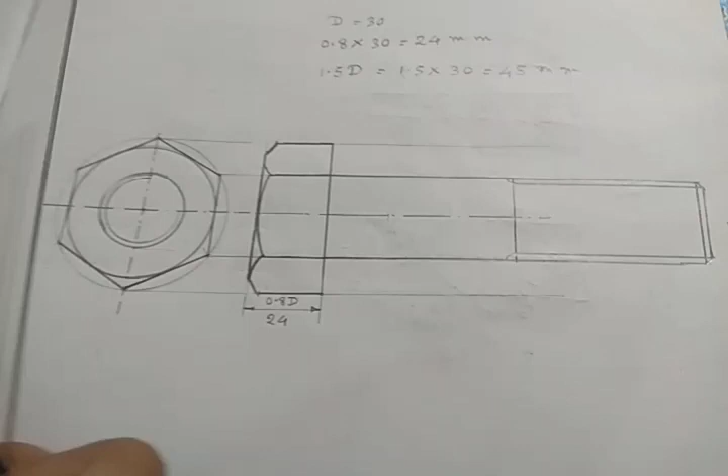In our last classes, we have done this drawing. This is basically a nut and bolt drawing, and this was from side view, and this was front view. We know how to draw it. Now, this is the second part of nut bolt drawing. Today, our topic is again nut bolt, and we are going to draw the nut bolt.

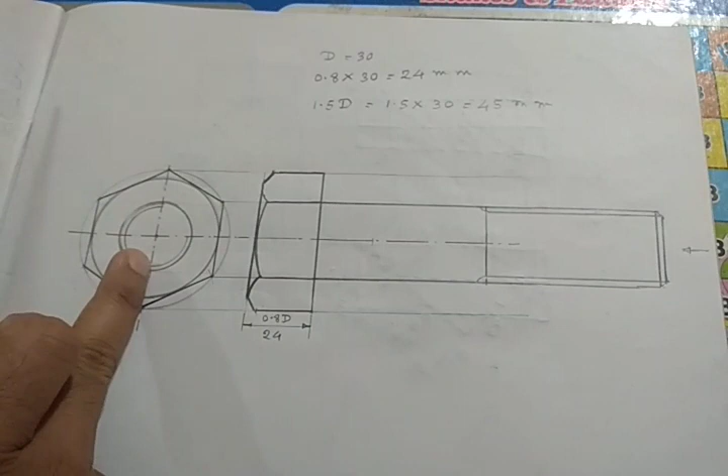What is the remaining here? The remaining part here is: front view and side view is complete, but top view is not here. We are going to draw the top view of the bolt here, and now I am going to show you how to draw the top view of the bolt.

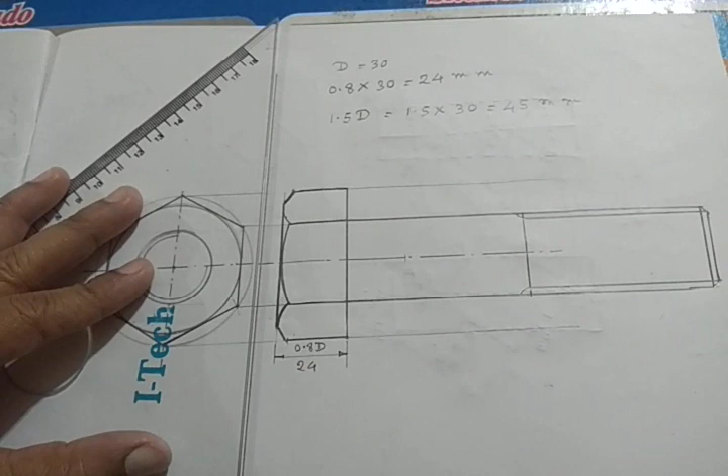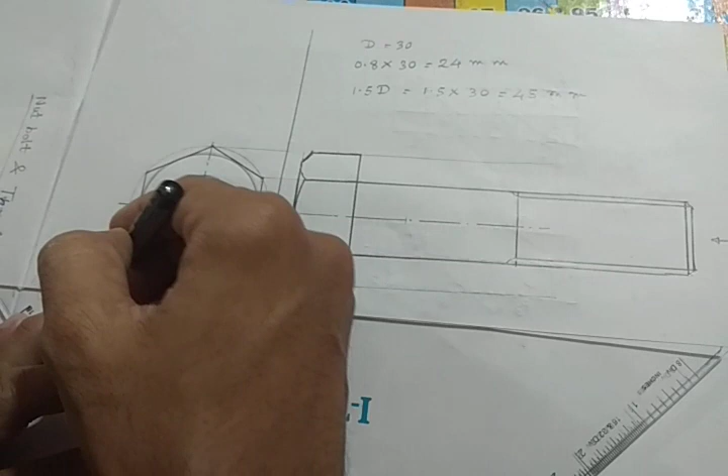Okay, let's go. Look, I am drawing a vertical line from the middle. From anywhere you can do that. That means there is no measurement here between front view and side view. From anywhere you can draw this line. And now I am drawing a horizontal line. I am again saying I am drawing it almost freehand because I am not using any set square or T square here, but you have to use set square obviously.

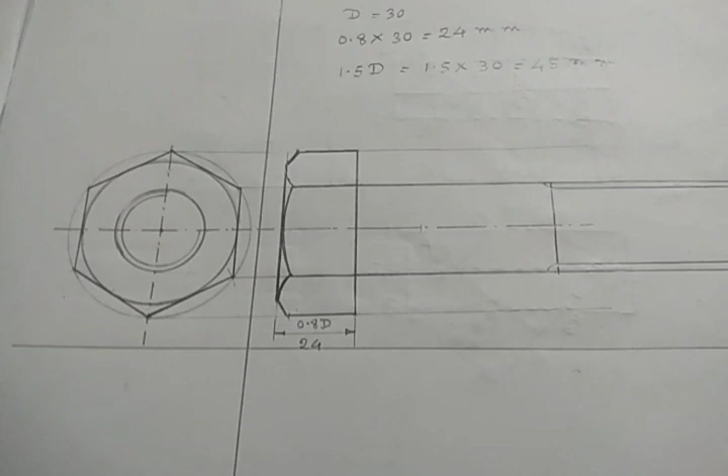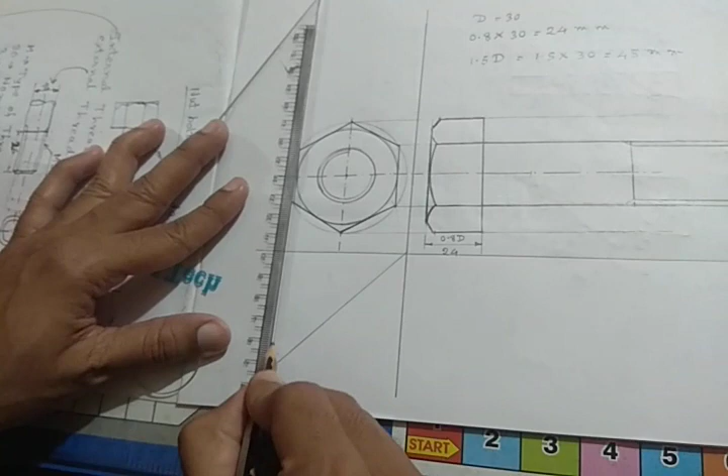Okay, then you have to draw a 45-degree angle from this point. So you have to draw 45-degree angle like this. Okay, now you have to draw these projection lines like this. These projection lines like this, and these projection lines, that means from the nominal diameter. This is from the nominal diameter.

So how many projection lines are there? 1, 2, 3, 4, 5. 5 projection lines are there. These are vertical projection lines. And now we have to draw the horizontal projection lines from these points. You know it. Again I am saying you have to use set square to draw these projection lines to make it proper horizontal. I am not using set square properly because I am only demonstrating you, but you must use set square for drawing this part.

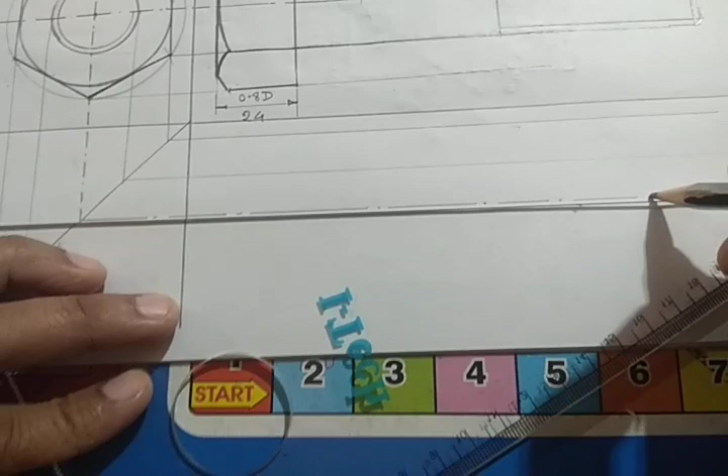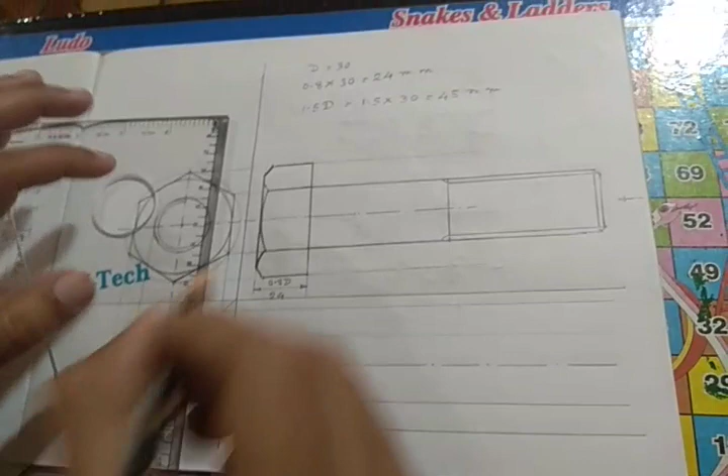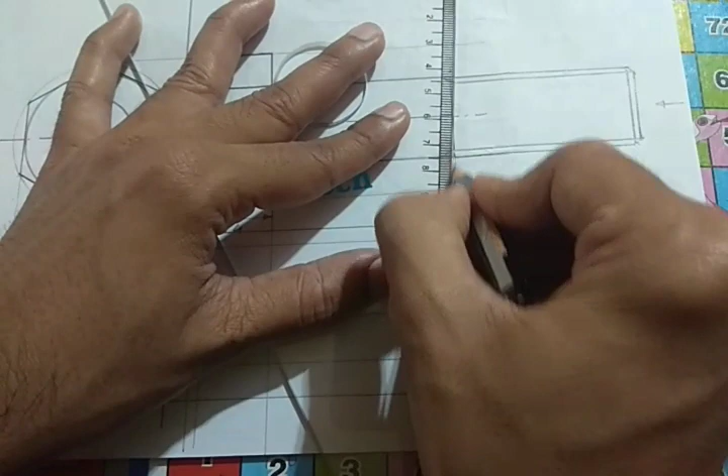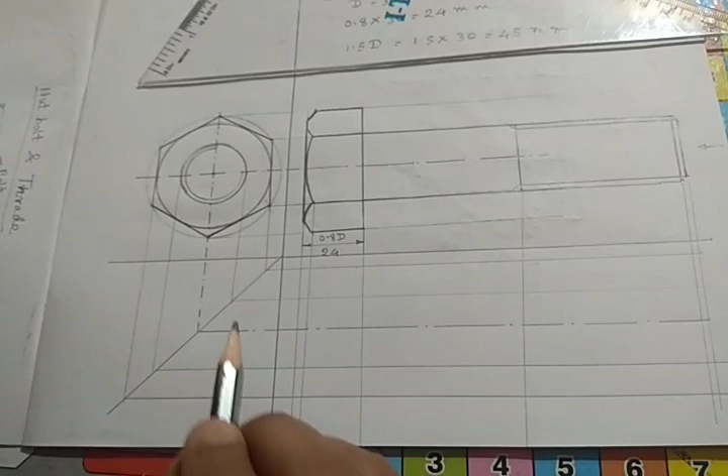Okay, it is done. 1, 2, 3, 4, 5. Now I am doing from front view. I am taking the projections from these points. Look at this. From this point, from these 2 points. Okay, from this point, and lastly from these 2 points. Okay, so projection lines are complete. Now I am doing the curves, and I will make it dark, and it will finally create a top view of the bolt.

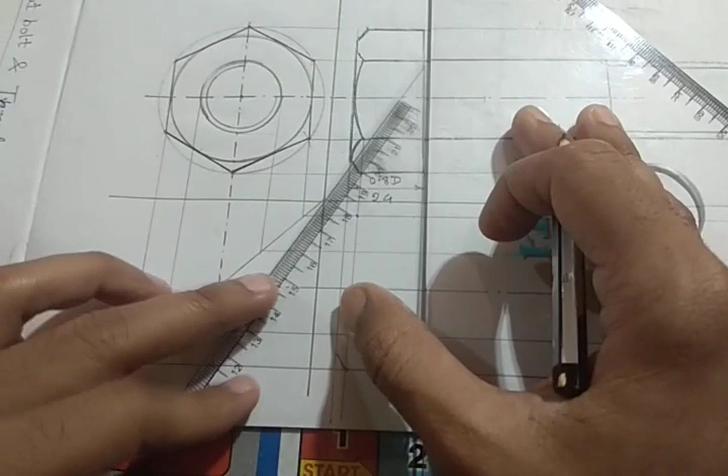You know, the chamfering angles were 30 degree. I'm again doing the chamfering angles 30 degree by using set square from this point and from this point. Look at this, 30 degree. I'm using 30 degree points. Look, and just reverse it from this point, again a 30-degree line. Look, from this point I am doing these 30-degree lines. Now I am doing a curve by freehand.

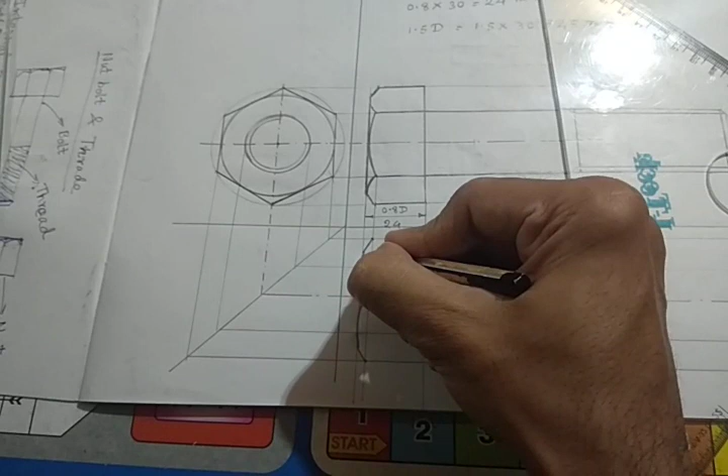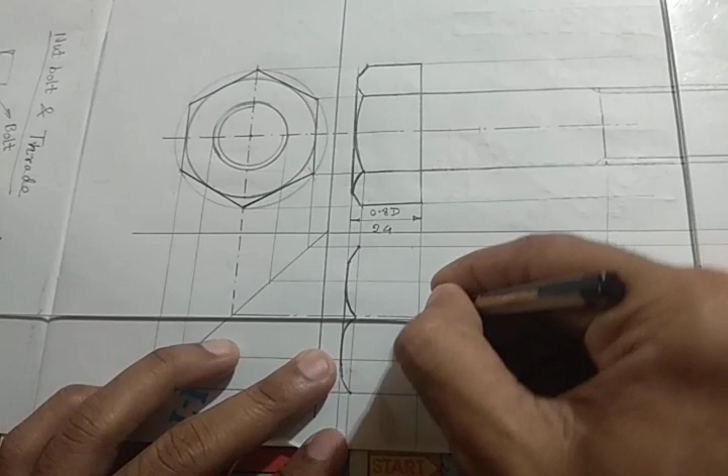Like this, and you have to just dark it. You have to just dark it, and this will be dark. Why this will be dark, I will explain you later. This will be dark, this will be dark, and this will be dark. Necessary parts I am making dark.

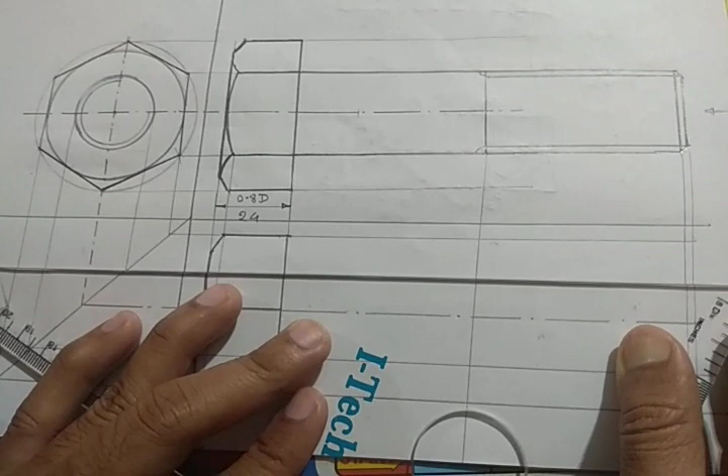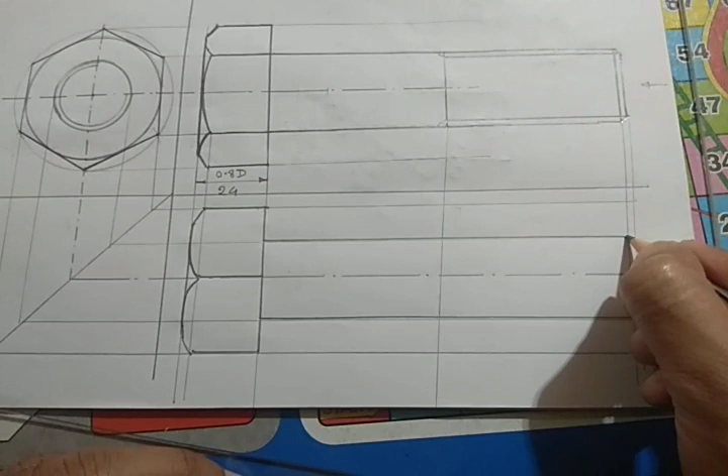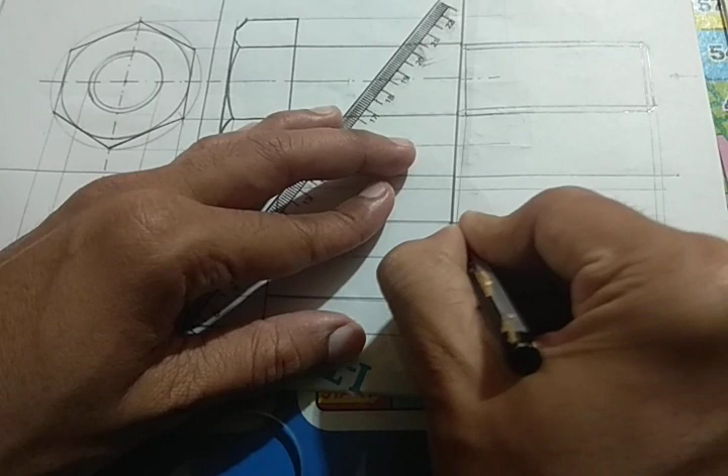And like the front view, I'm again doing this part, a little bit of chamfering. I'm doing it by freehand, but this angle will be 45 degree, you know. And you have to do the thread again by using double line. Like this. This is our thread part, and this is the end part of this thread. So look at this. This is the top view of the bolt.

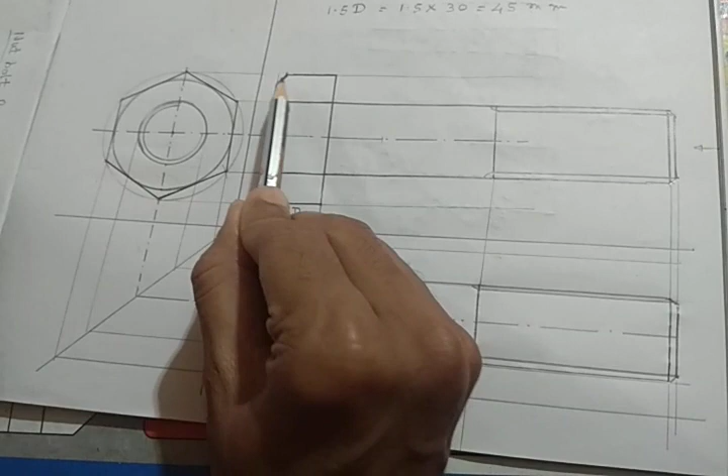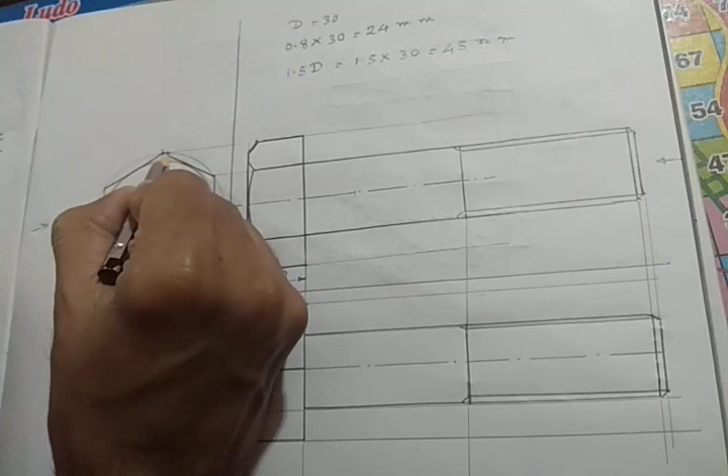Now one thing I want to explain you. In front view, you can see three parts, three layers, three surfaces. One surface, two surface, and three surface. Why? Because from front view, if I look at it from this side, look at this hexagonal bolt: one surface, two surface, and three surface. These three surfaces are visible from front view.

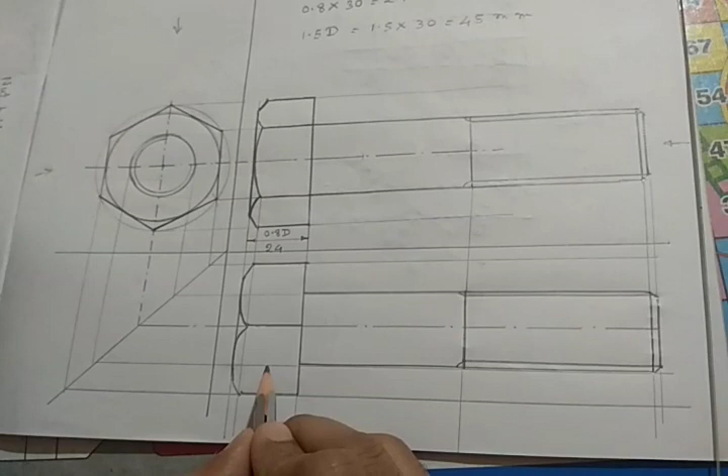If you look from top, then look, there is one surface and two surface. And in top view, look, there is one surface and there is another surface. So from top view, two surfaces will be visible, and from front view, three surfaces will be visible. So this is the complete drawing: front view, top view, and side view of a bolt.

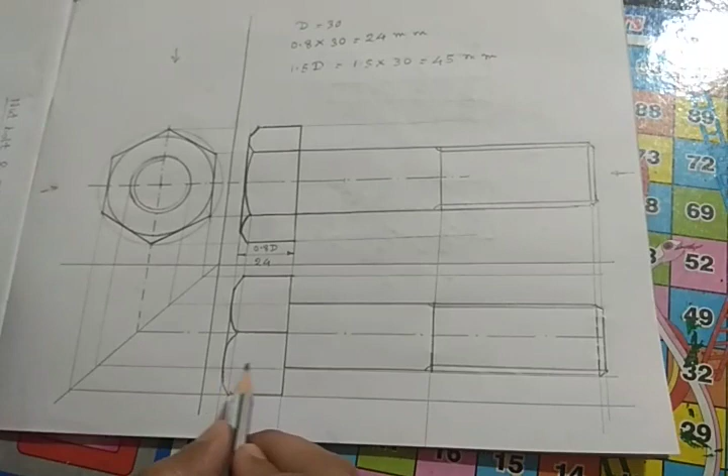Okay, now I will explain you how to draw a nut. This is very simple. I think you can do it, but one thing: what lines are dark in my drawing, look at it very carefully. Except these lines, you should not dark any other line. Except these lines, the other lines will be thin continuous lines. I am showing which lines will be dark.

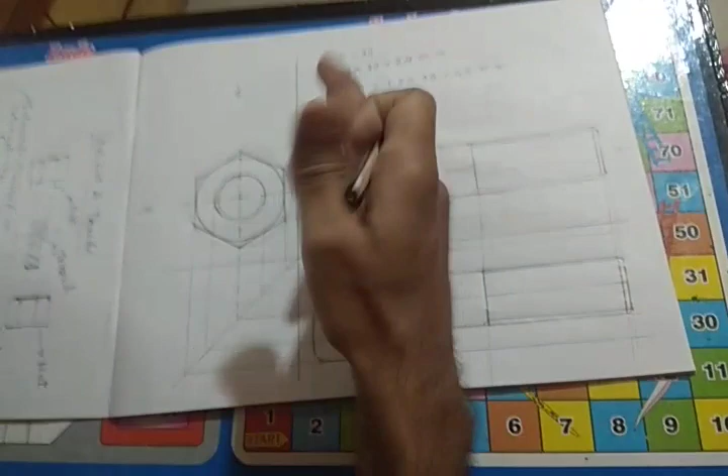Okay, so next I am going to the nut part, how to draw a nut. It is the same. In case of nut, this part will not be there, because for nut there is no extended part. So I am drawing a nut, and in nut there will be internal thread. This is the difference. So look how I am drawing a nut. Here also d is equal to 30. I am taking d is equal to 30.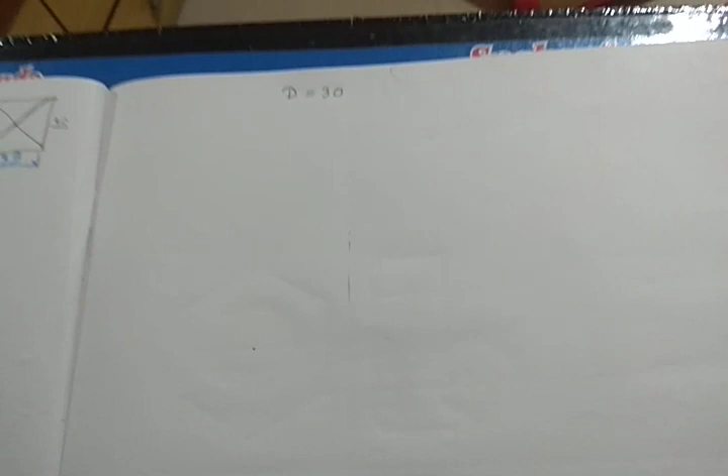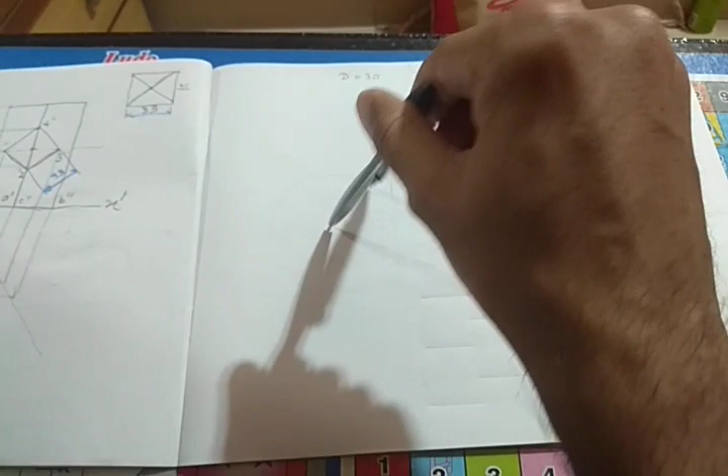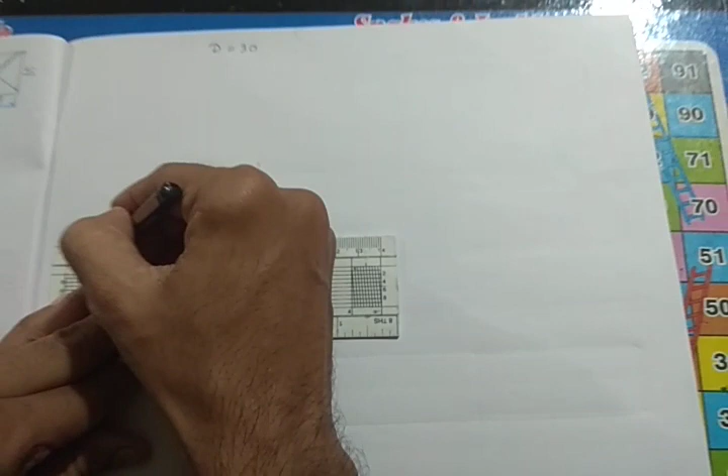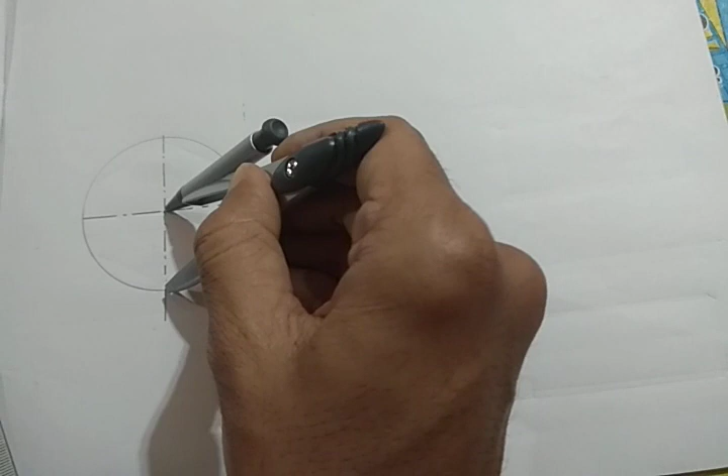So from the last class, you know, I have to take 30 millimeter from the scale, and you have to make a circle in light. Means it will be light, it will not be dark. And then you have to draw a vertical and horizontal line. Again I am saying you have to use set squares to draw the horizontal and vertical lines. I am doing it only by scale. You have to take care about this, otherwise the drawing will not be correct. Then what will we do? We will draw a hexagon.

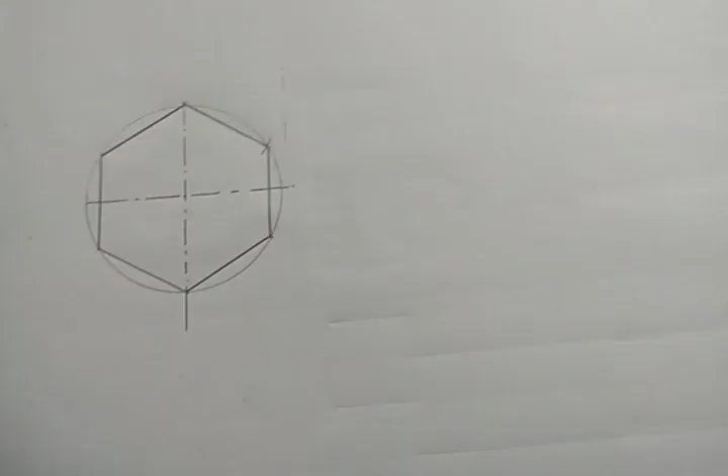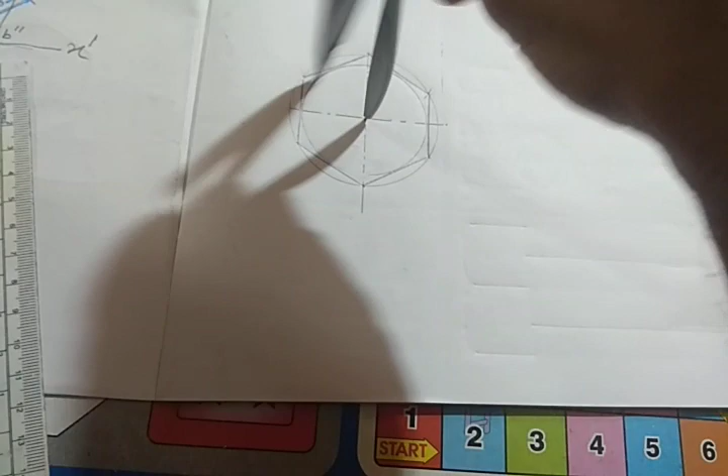Okay, so I am making it hexagon. This is same like bolt, but for nut there will be some difference, just like bolt. Okay, this will be dark, and now like bolt I have to draw the dark circles like this, dark circles like this, like bolt. This will be dark. This will be dark.

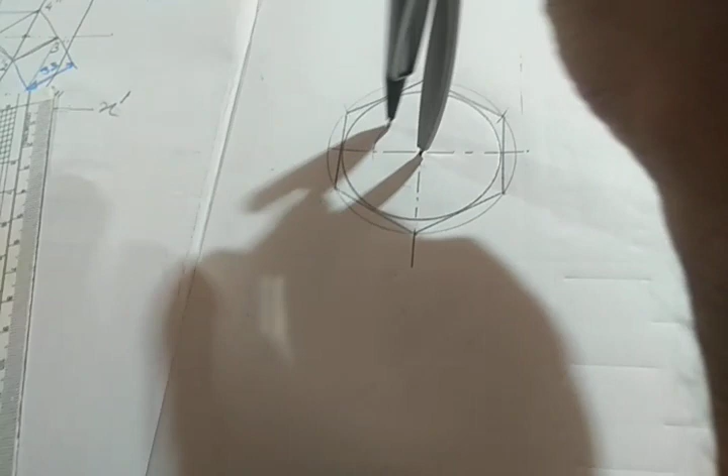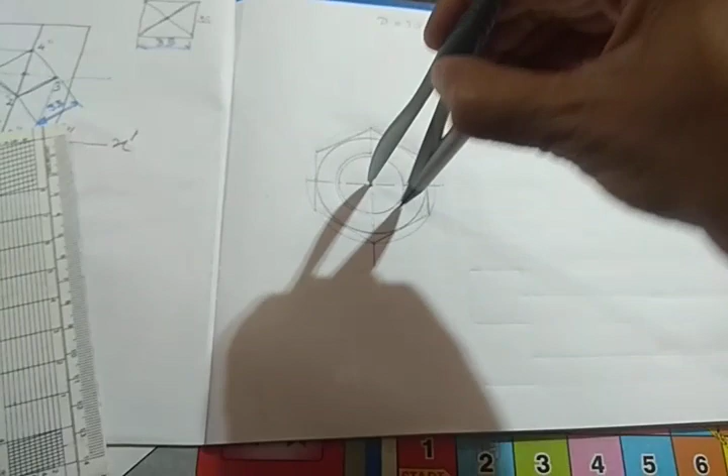Nominal diameter is 30, so I am taking radius 15, and I am doing the circle of the hole of the nut, which is 30, and it will be dark. As it is a nut, there is an internal thread, you have to do a 3/4 circle of 2 millimeter extra radius. The 3/4 circle will be like this, and it will be external. For internal thread, the 3/4 circle will be external. This is one of the differences between nut and bolt.

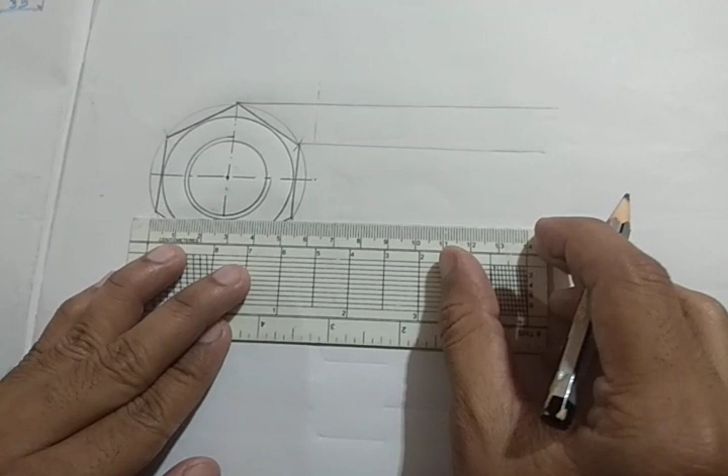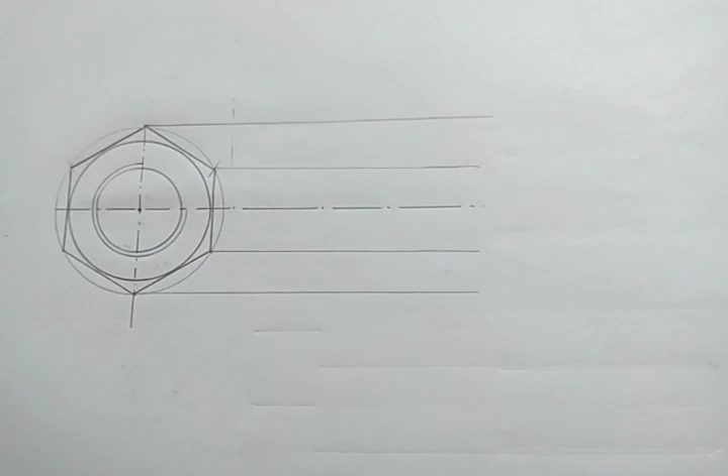So this is our side view. The side view is complete. Now we have to do the front view. For front view, we have to do the same things. We have to draw the horizontal projection lines. Again I am saying we have to draw these lines by using set squares. Don't use freehand like me. For saving my time, I am using freehand for this.

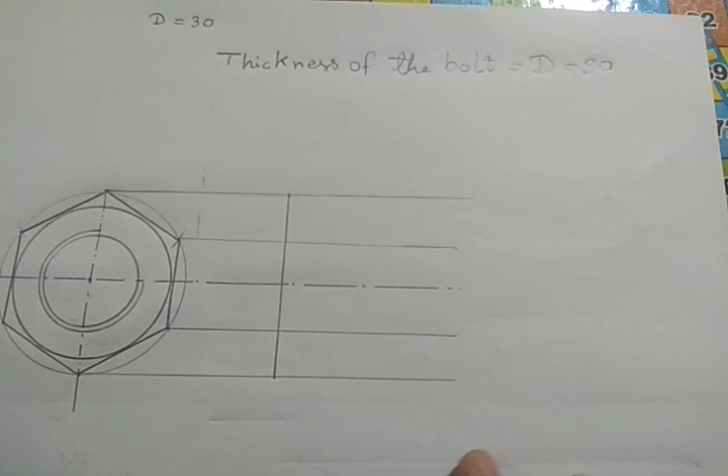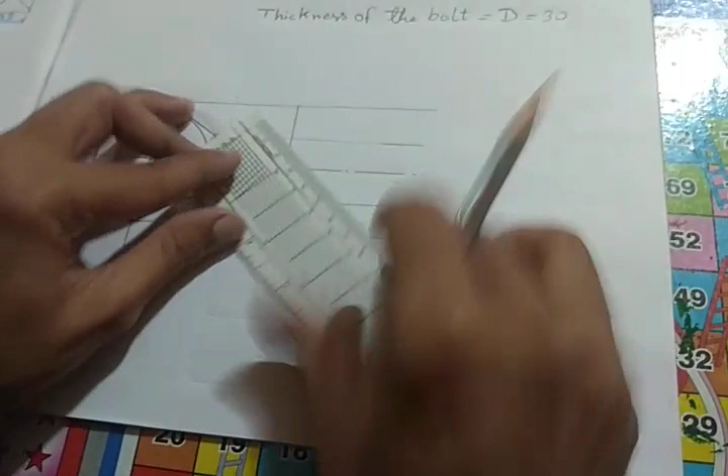Now I have to do a rectangle like bolt. This will be perfect vertical, and the thickness of the nut, this is equal to D. That means 30 millimeter. In case of bolt, what is the thickness of the bolt head? This is 0.8 D, but there is a difference. The difference is this thickness will be D. In that case, this was 24, but for nut, the thickness will be 30. So I am taking 30 millimeter thickness here and doing again a rectangle.

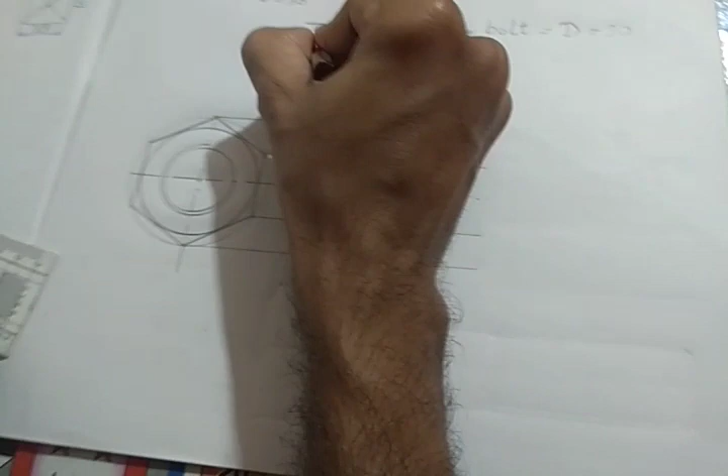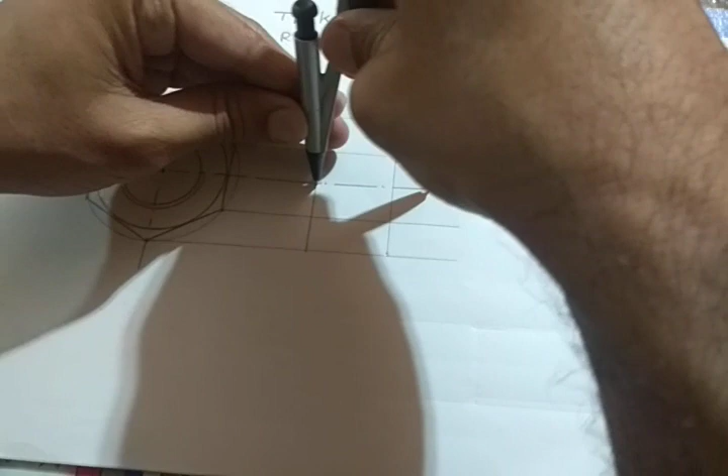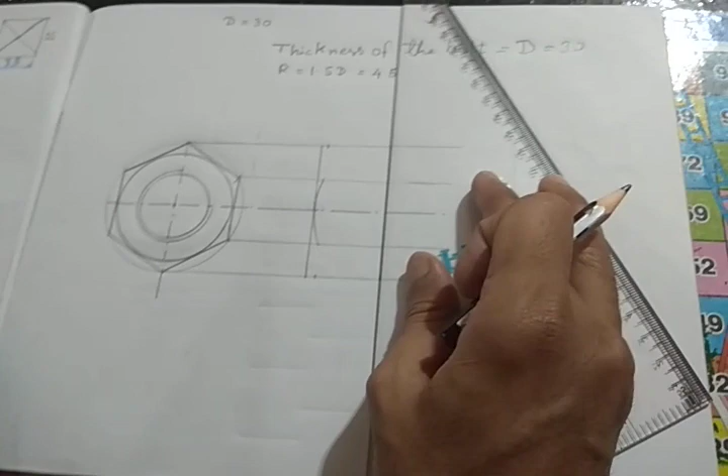Now the other things are same. What is the radius? Radius is 1.5 D, that means 45. So we have to take 45 millimeter from this point like this, and you have to draw an arc like this, and as you have done in bolt, you have to take a point here, and from this point you have to draw 30-degree lines like this. You know it because I have demonstrated it earlier in the last drawing. This line will be 30-degree.

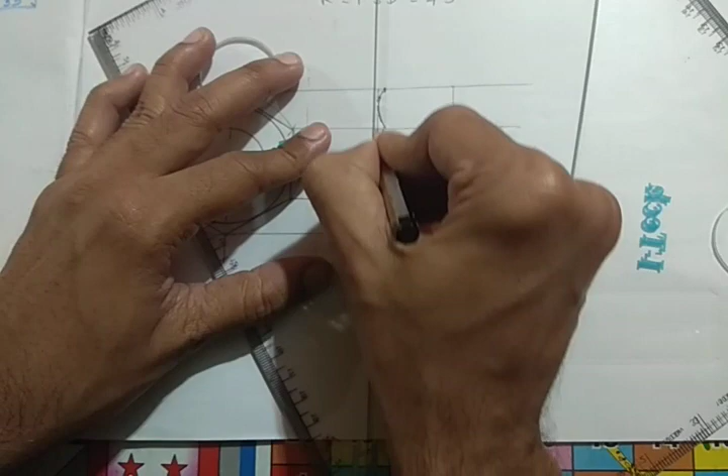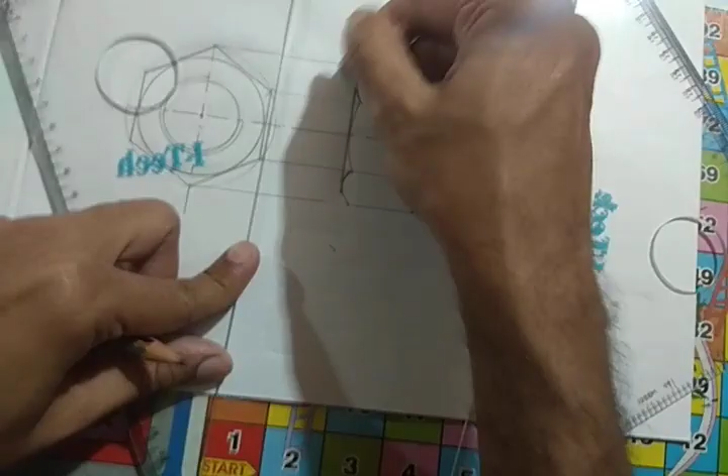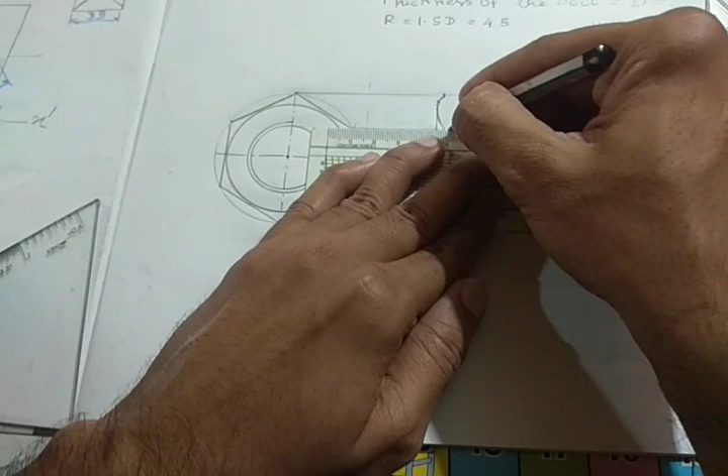And this part will be smooth curve, you know it. This part will be smooth curve, and this will be dark. And the corner will be erased. We don't need the corner because you have to show the chamfers. But here, what will be the dark part? Obviously from here this will be dark, this will be dark, and this will be dark.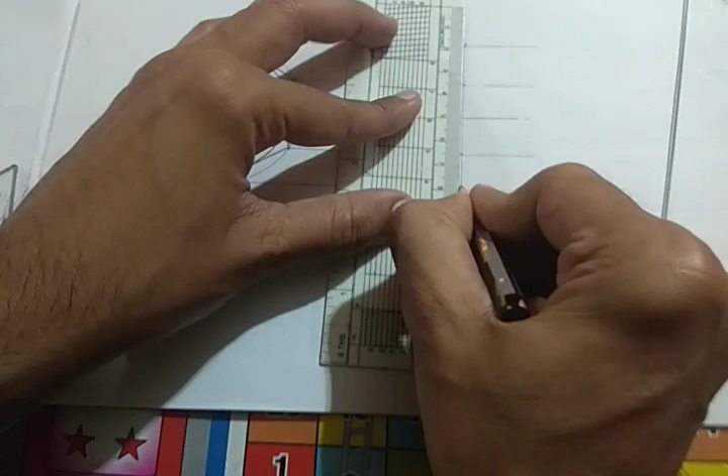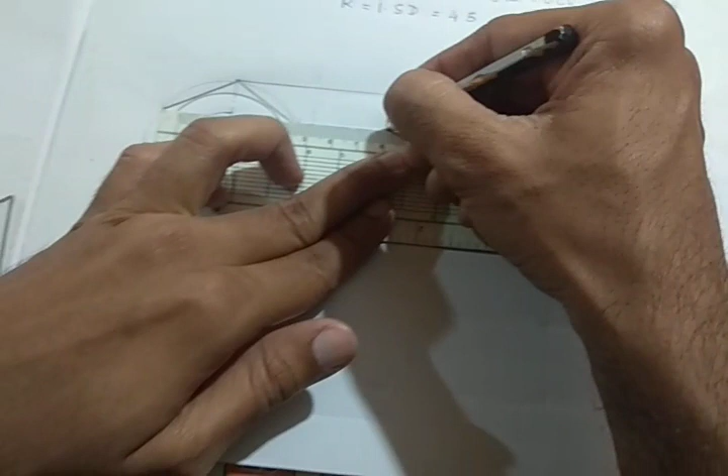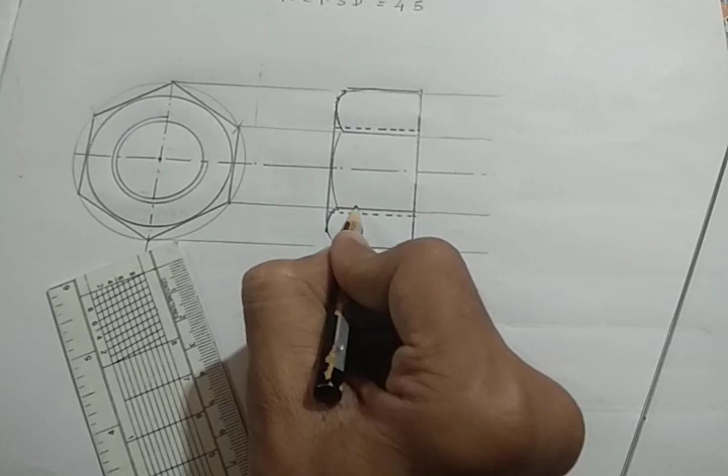But one thing, here is a hole, that means there is a thread. You have to consider it. So for thread, we have to give the double line here, but it will be dotted. Why dotted? Because the thread is inside the nut. So double line, this part will be dotted, but this line will not be dotted because it is coinciding with this point. The dotted line and thick line both go through this area, but the importance of the thick line is more, so I am giving thick line here.

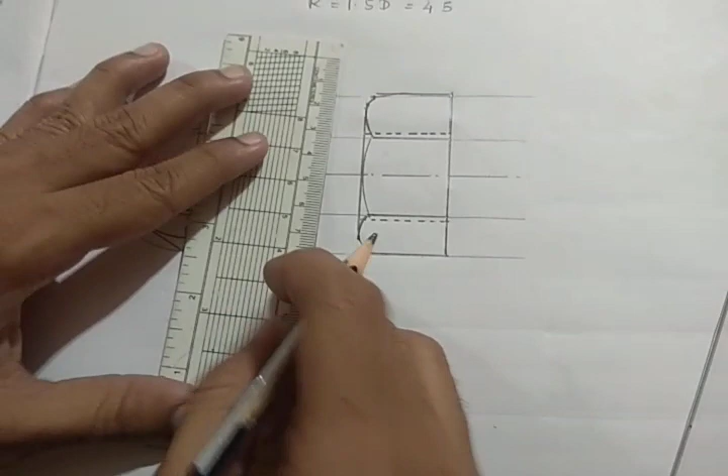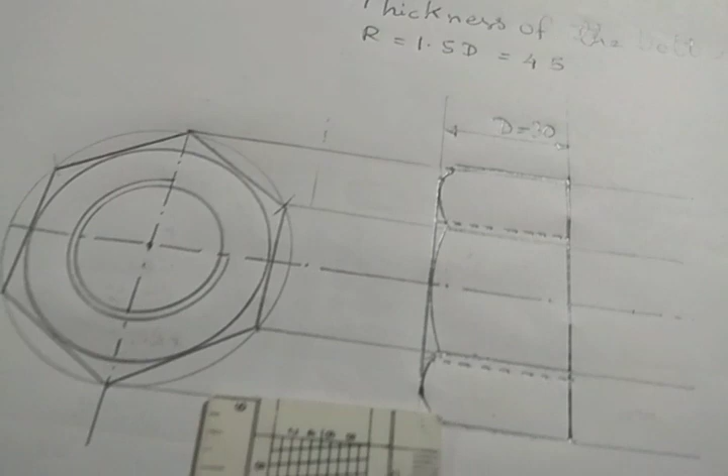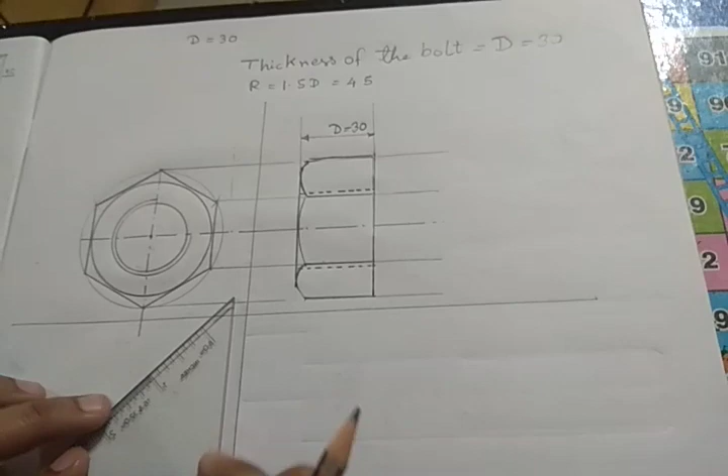Okay, so this is the threaded part and there is a hole, and you can see this is the front view. Now I am going to do the top view. One thing I just want to mention, the thickness of the nut is D, that means 30 millimeter. So D is equal to 30. Now just like bolt, I am doing the top view. From this point I am drawing a 45-degree line, and as before I am drawing the projection lines.

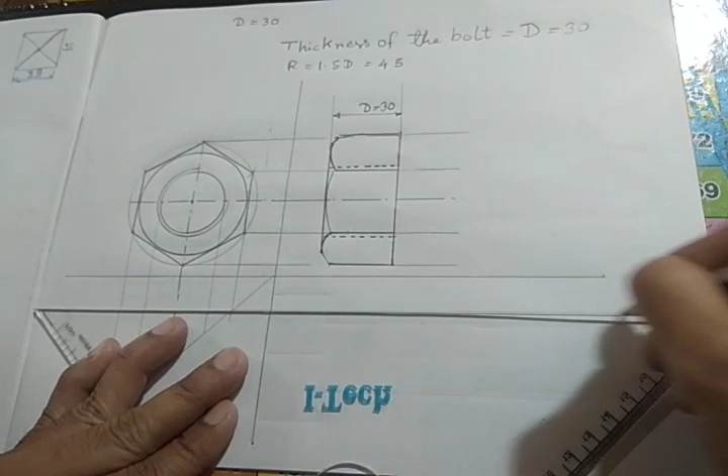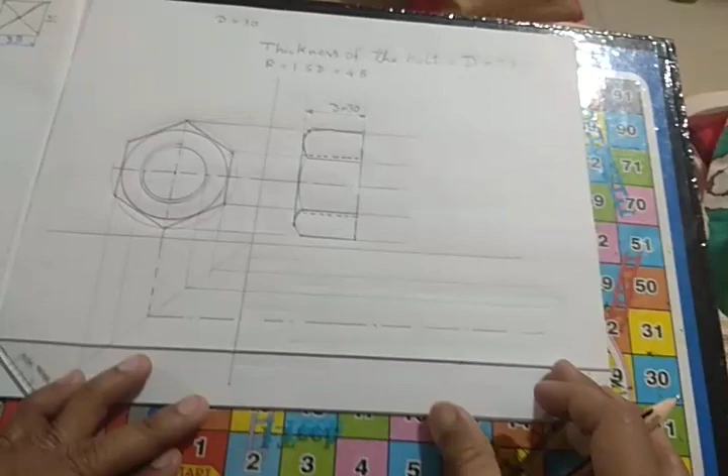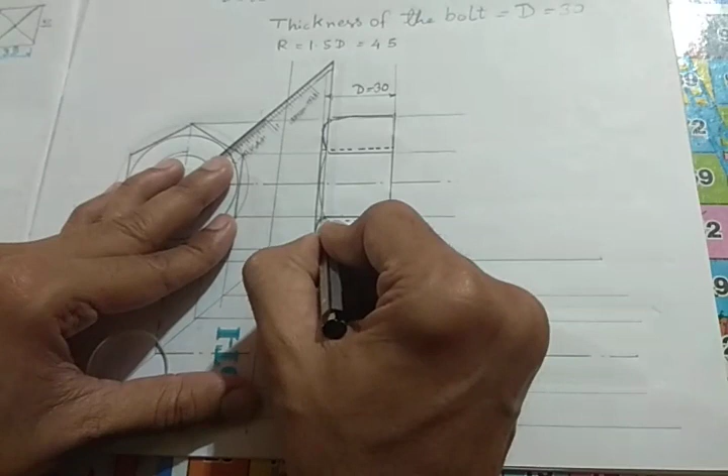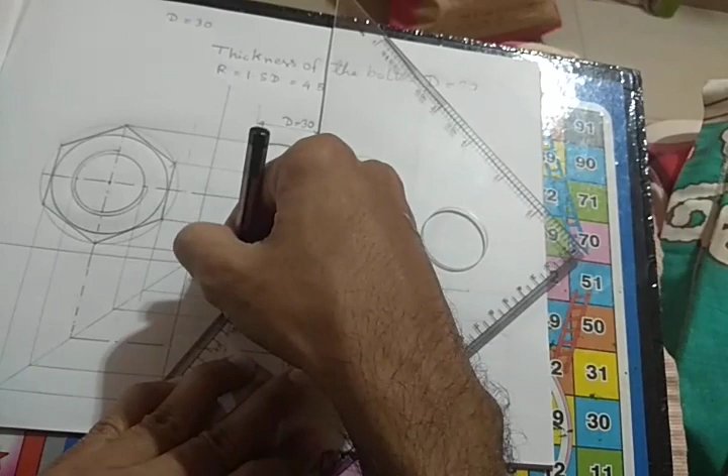And you have to do it from nominal diameter also. From this point you have to draw the horizontal lines like bolt. There is no complexity in it. This line will be center line. So this part is complete. Now I am taking horizontal lines from these points. So again 30-degree lines from these 2 points, just like bolt.

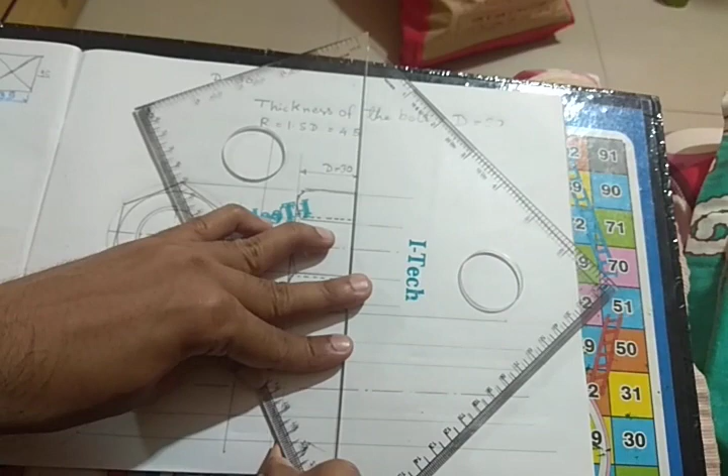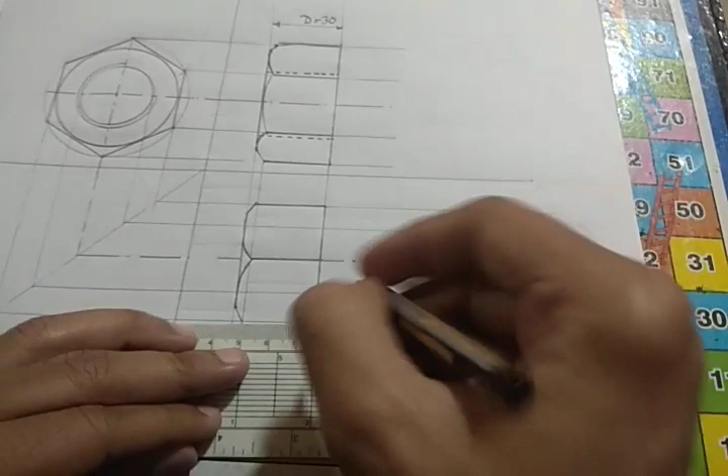So I have done it here, and now I have to dark some parts. This part will be dark, this part will be dark, and this will be a complete curve like bolt. This part will be dark. The middle part will be dark, and this part will be dark. Our drawing is almost complete.

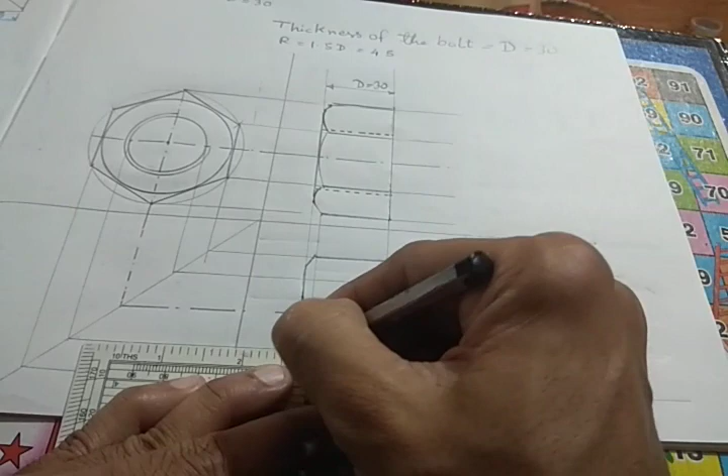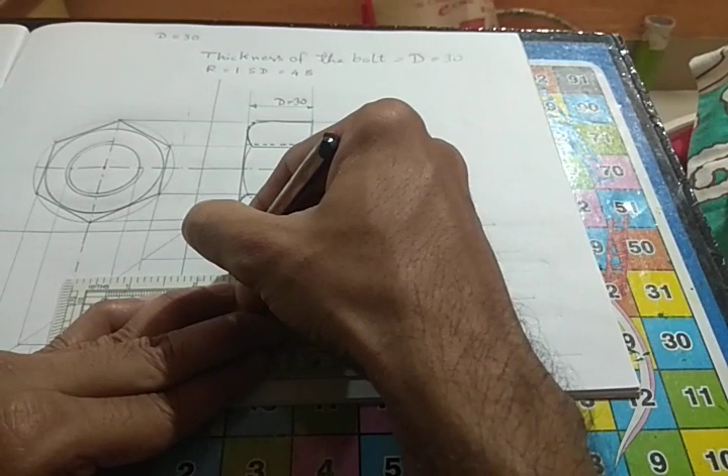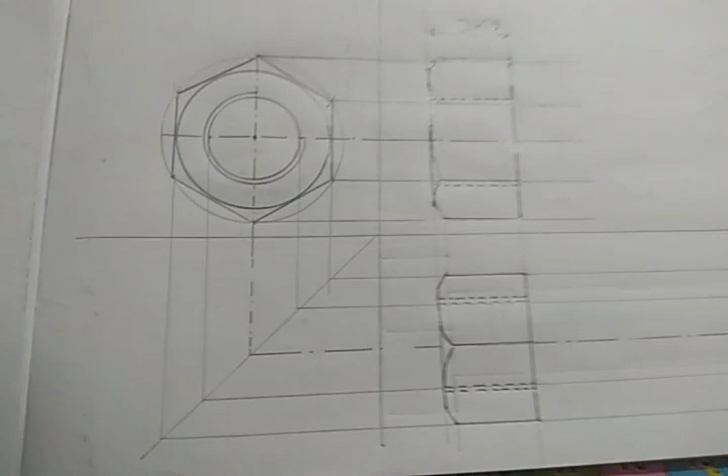One thing, here is also a hole, and there is also an internal thread. We have to show it in our top view. How will I show it? From this point you have to draw dotted lines. Why dotted? Because the internal thread is not visible, and it must be double line because it is thread. Okay, so look at this drawing. This is the final drawing of a nut. The only difference from the bolt is the thickness.